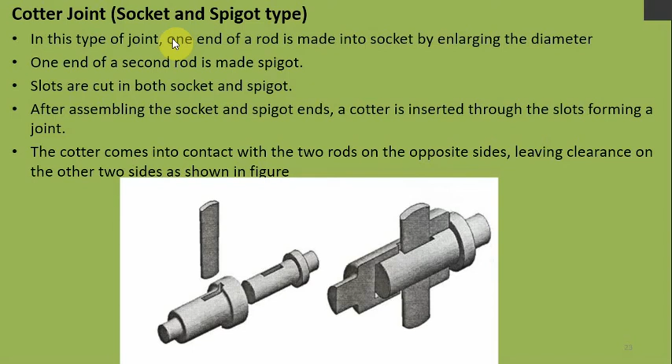So this is the physical appearance of a socket and spigot joint or cotter joint. Now this is how it looks after joining. So this is the rod, this is the other side rod or shaft, this is the cotter, this is the socket, this is the spigot, and altogether it looks like this.

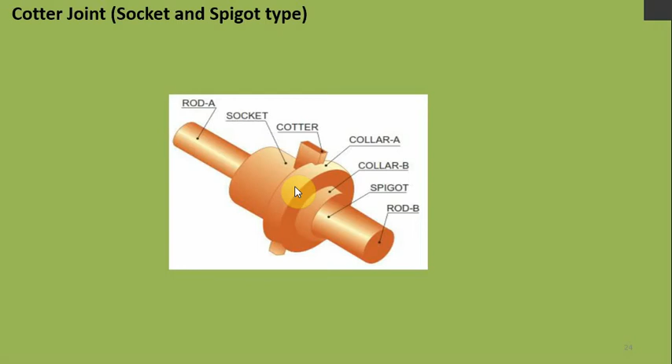First you draw a central axis line, and before you start drawing the figure, again I am reminding you, always draw all the lines using thin lines in the beginning, because in between we may have to rub them out or convert them into dotted lines. You can start drawing this figure either from the right side or from the left side. Anyway, I am going to start from the left side.

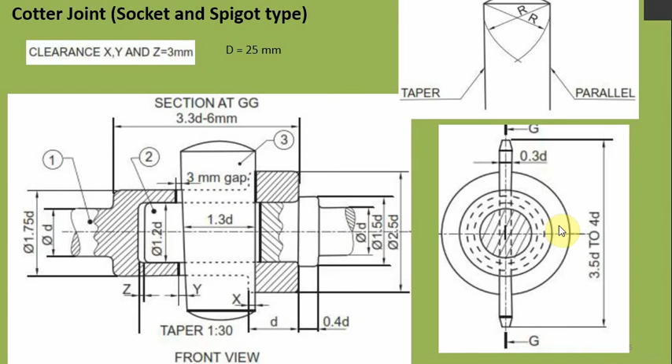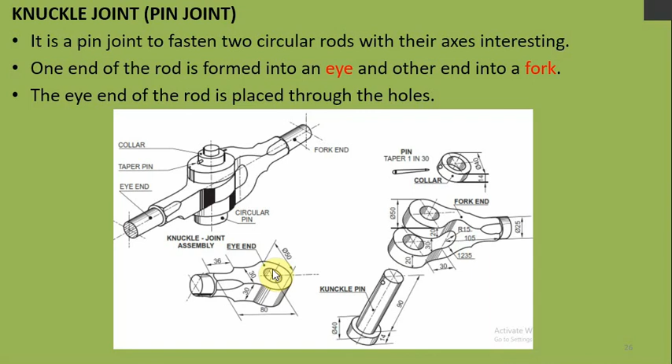The eye end of the rod is placed in the fork. So we have made a hole here and here. We will insert this eye end into this fork end, so that the hole centers coincide, and then we will insert this knuckle pin. From the top you can see one hole here. We will insert this collar over here, and this collar also has one hole. This hole and this hole should coincide, and then we will insert a pin. So this will be the assembly.

So you can see this is the circular pin. Here it is a collar. We are inserting a taper pin here, so that it will form a single joint. The advantage of this kind of joint is, after assembly, the rods swivel about the center pin. Knuckle joints are used in air brakes of locomotives, suspension links, etc. So it can be moved like this, it can swivel. That's the advantage of this knuckle joint. Whenever we need a movement or rotation like this, we can go for a knuckle joint.

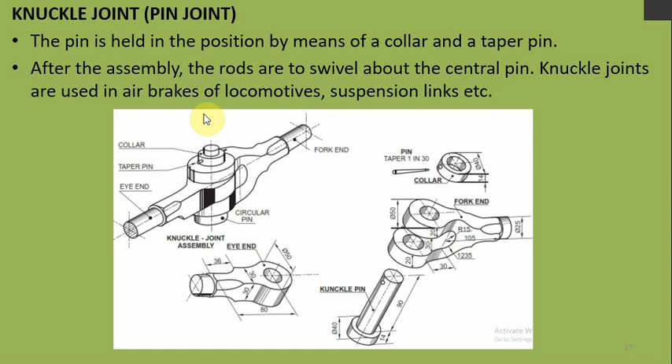This is an enlarged figure. So all the details are here. Now we will move to the drawing side: how to draw the 2D sketch of this knuckle joint.

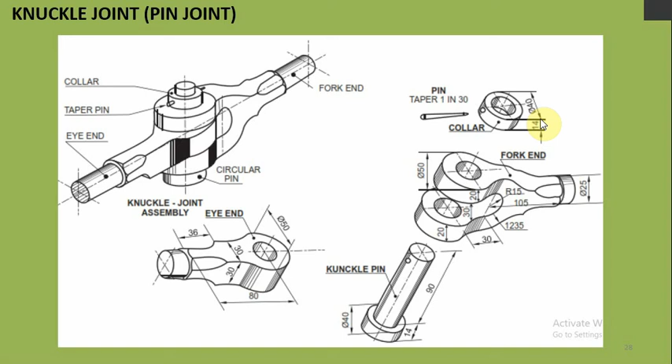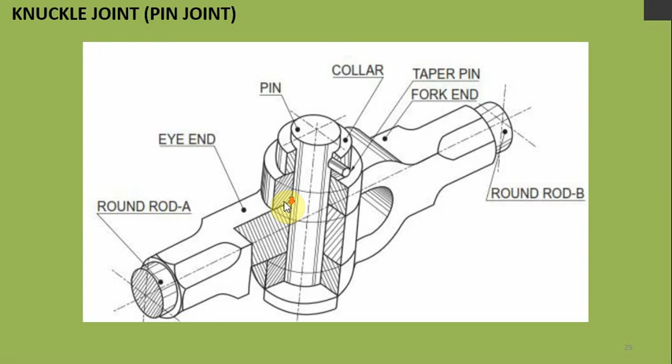Again, one more figure is here. This also shows the interior of the joint. Anyway, it is not a very complex one. It's a very simple one. So we'll see how to draw it. So this is the figure. Here also we can take the diameter as 25 mm. So all the rest of the dimensions are expressed in terms of this shaft diameter.

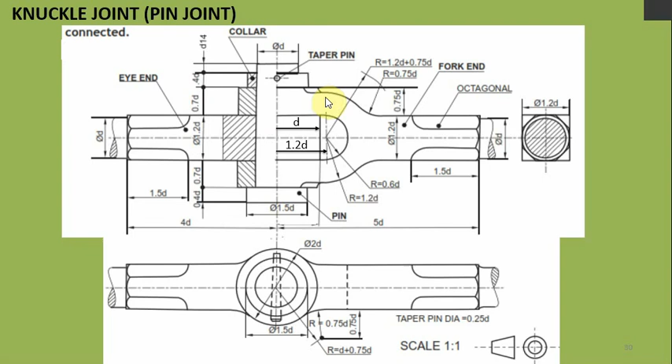So take that as center. First draw the semicircle at a radius of 1.2D. Connect these two lines with that one, and next this arc; this dimension is again equal to 1.2D. So you join that arc with this one like this, and continue as it is. Anyway, all these are very simple procedures, no need to explain much. All other dimensions are given here clearly.

So your task is to draw this figure in your sketchbook taking the shaft diameter as 25 mm, and if the figure is too big for your sketchbook, then go for scaling it. So that's all about the joints. In the next video we will discuss couplings.